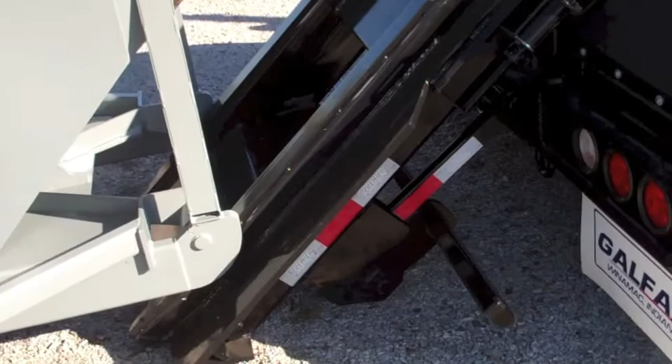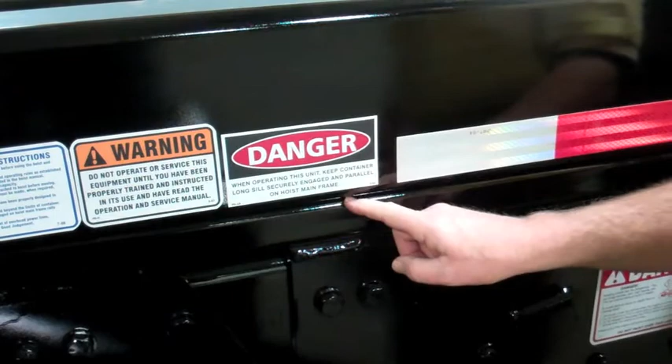This type of hoist is available in two design options. One has a traditional subframe and the other has no subframe. The OR subframe option has an 8-inch tall mainframe tube and a 2-inch tall subframe. The subframeless NOR model has a 10-inch tall mainframe tube with reinforcing strips on the top and the bottom. Your GalFab sales representative will help you choose which model best suits your application.

The first feature we will look at is the auto fold forward DOT bumper. This bumper folds toward the truck frame when the hoist is in the raised position. Most other manufacturers' DOT bumpers fold down towards the tail of the hoist. As a result, the GalFab fold forward design does not as easily get bent up or torn off in landfills

or other non-flat surfaces. This fold forward design also tends not to pick up trash as easily, as it is up and out of the way while dumping a load. See how the bumper folds as the hoist is raised and lowered. This is a prime example of the GalFab Advantage.

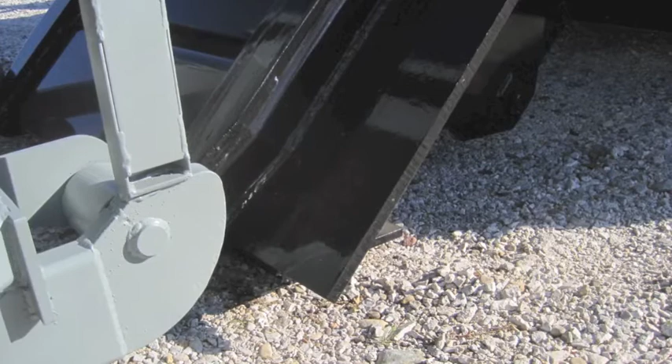These are the long sill container support, or rear wings. The GalFab long sill container support is standard on most GalFab cable hoist models. The wings aid in loading misaligned containers and alleviates the need for the two most rear side rollers per side on the hoist. As most haulers know, the rear side rollers are replaced due to wear more than any others.

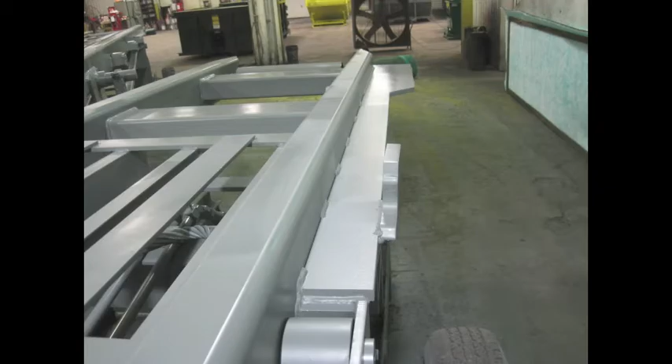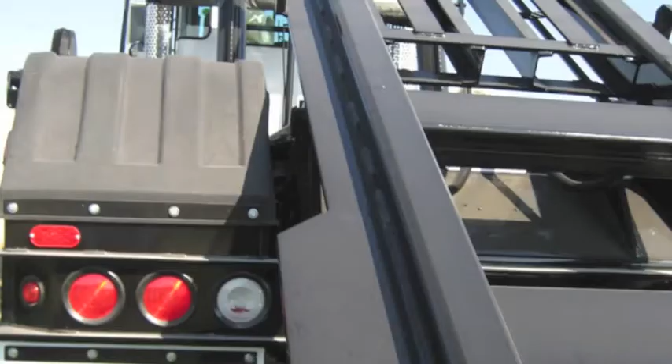The long sill support also increases the life of the long sill of the container by allowing up to 8 feet of the container to rest on the support. It also allows containers with no nose cone or worn nose cone rollers to engage the wing and slide forward more easily. This reduces wear and scarfing of the mainframe. A little grease in this area would reduce friction and promote easier forward movement.

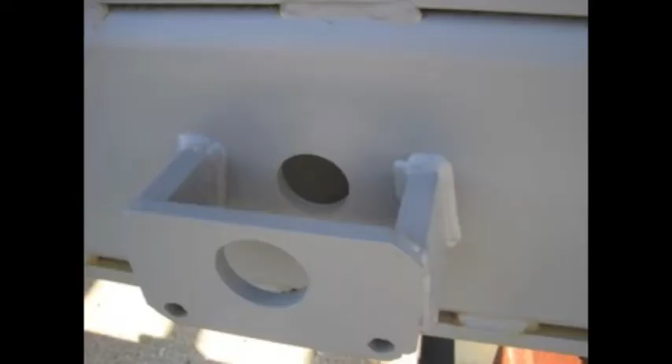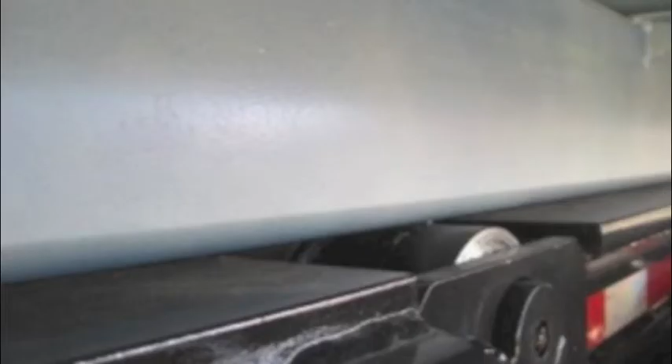The GalFab side roller system is unique in that the shaft rests in a hole drilled into the mainframe of the hoist. Some manufacturers weld a plate onto the side of the mainframe. The GalFab design allows the container long sills to be fully supported by the side rollers. Therefore, there is more bearing on the shaft and there is no overhung load.

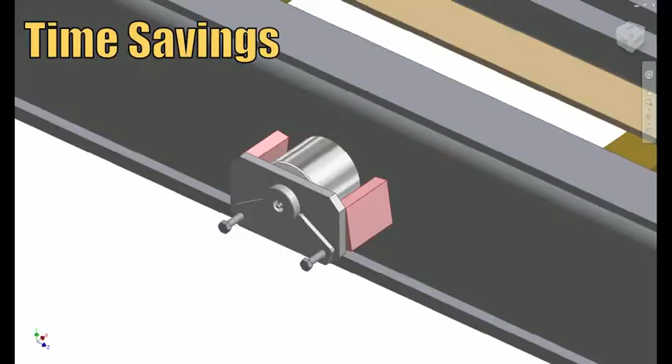By loosening the 2 bolts on the front plate, the shaft can be easily removed for roller replacement. You will really appreciate the time savings realized by changing a shaft by removing 2 bolts as opposed to cutting off a stub shaft and welding on a new one. There are no cotter pins or washers that wear out prematurely. This is also the GalFab Advantage.

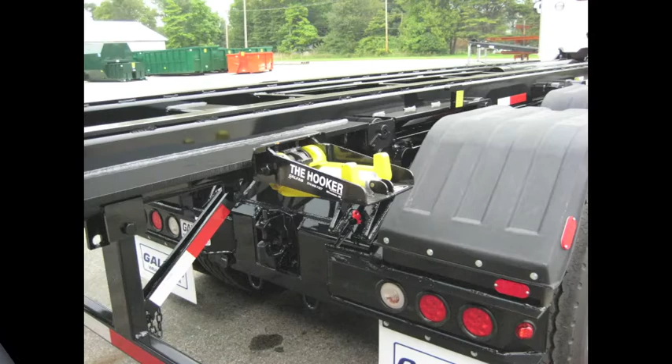We have 2 types of optional hold-on systems that we normally use, the hooker and a ratchet tie-down. The hooker uses air-operated components integrated with PTO controls. When the PTO is on, the arms are down and out of the way for loading or unloading. When the PTO is off, the arms come up and secure the container long sills. Manual controls are available. The 4 hooker arms provide a potential vertical load capacity of 40,000 pounds each.

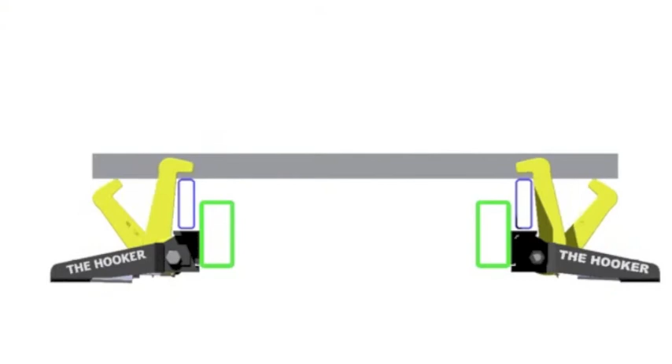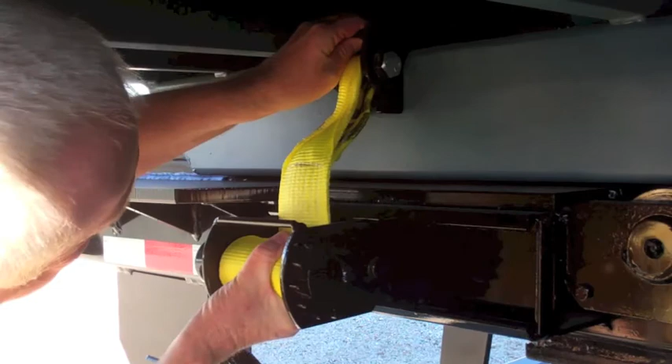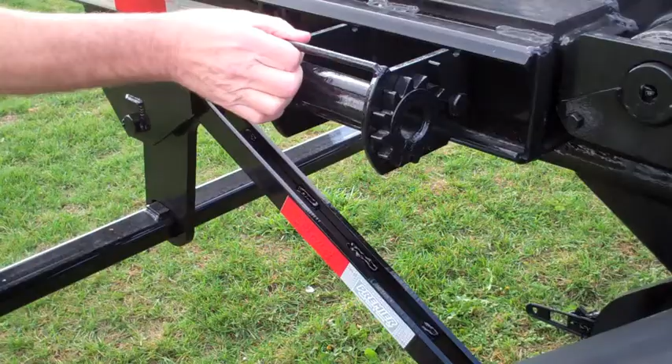Ratchet tie-downs use steel hooks on 4-inch wide nylon straps and a ratcheting assembly on each side to tie the container down. The ratchets slide in channels to line up with the spaces between the cross sills on the container. Both systems require an open space between the cross sills and space above the long sills to allow the systems to engage the container long sills.

The unit is now ready for delivery to the customer. An instruction manual is included for maintenance, service, and parts replacement. Care has been taken to be sure that all of the details requested by the customer have been adhered to. Our goal at GalFab is to make sure your hoist provides you with many years of great service. Proper maintenance, absence of abuse, and a good training program are essential to make sure that those goals are attained with your GalFab roll-off hoist.